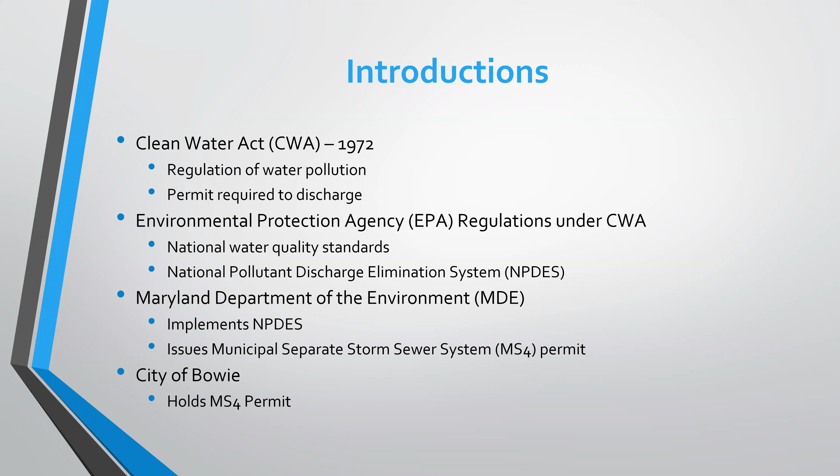So the City of Bowie is required to comply with the National Pollutant Discharge Elimination System, NPDES permit, for small municipal separate storm sewer systems, MS4 in short, to implement best management practices and various programs to reduce pollution discharges and protect water quality. The city's MS4 permit, effective in 2017, mandates permittees to restore 20% of existing impervious area that is not already treated with water quality best management practices by 2025.

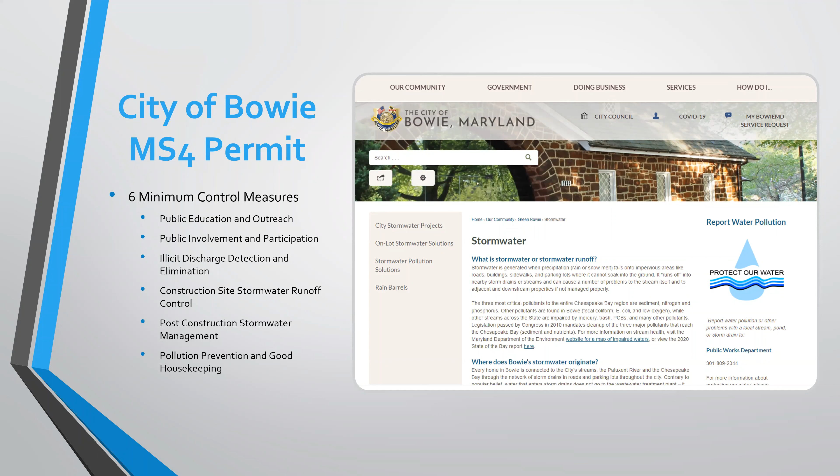So to restore the bay, the TMDL identified the overall loading capacity of nitrogen, phosphorus, and sediment that can be present in the bay to achieve applicable water quality standards. So within the Maryland watershed implementation plan, the goals were set to reduce about 25% of the nutrient loading in nitrogen, 24% reduction in phosphorus, and also 20% reduction in sediment from the base year of 2009. So in a sense, the TMDL is a historic and comprehensive pollution diet to restore clean water in the Chesapeake Bay.

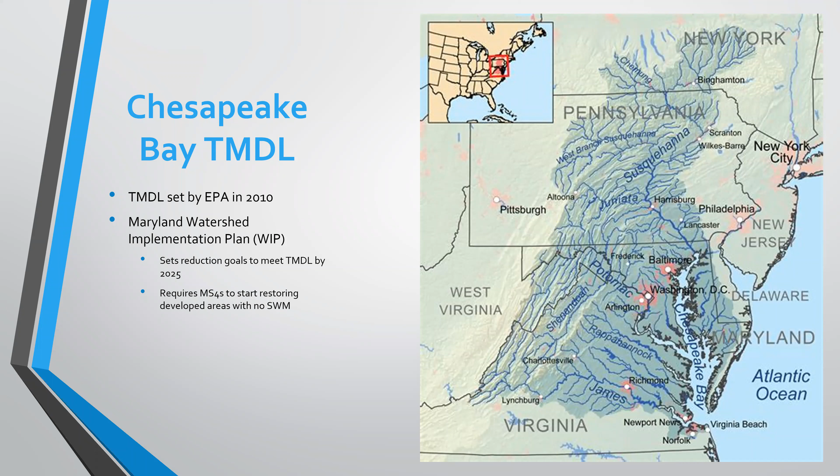And also a number of elements, including watershed implementation plans, milestones, and progress tracking are put in place by MDE and other Bay jurisdictions to ensure that all pollution control measures needed to fully restore the Bay and its tidal rivers are in place by 2025. So that kind of sums up the legal framework for the MS4 permit.

So much of Bowie was built by Levitt and Sons in the 1960s before important environmental regulations such as the Clean Water Act were put in place. Bowie, along with dozens of communities across the state, is now required to take steps to improve the quality of water that will eventually flow to the Chesapeake Bay. So in general, stream restoration projects aim to mitigate harmful effects of unmanaged stormwater runoff and also restore damaged or lost ecological functions and processes and stabilize eroded stream channels to prevent future erosions.

In addition, these stream restoration projects provide credits towards the stormwater treatment requirements stipulated in the MS4 permit. So recent changes to the accounting guidance from the state for calculating credit also made stream restoration projects much more cost effective. So the city of Bowie has successfully completed the first ever stream restoration project, Saddlebrook Branch stream restoration, in 2021, and now the city is working on the design of the second stream restoration project, Millstream Branch MS4 stream restoration, which is our main focus tonight.

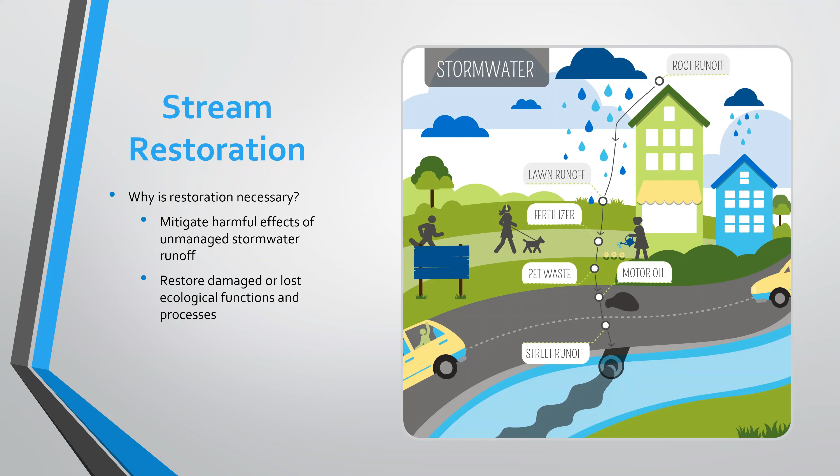So for this project, Millstream Branch MS4 stream restoration project, since 2014, the city has contracted with several engineering consulting companies to assess and prioritize the projects for the impervious area restoration to maximize water quality and impervious area credit for the city's MS4 permit. A few stream and pond restoration projects have been identified to meet this objective, which includes this current project that we're presenting tonight, in short, Millstream Branch MS4 project.

So the objective of this project is to restore hydrology and stream channel of Millstream Branch, main stem reach 4, stabilize eroded stream bank and channel, prevent further channel and stream bank erosion, and reduce sediment and nutrient delivery downstream of the current location.

Also, this project will help the city meet the MS4 permit requirements. So for this project, the city has identified an approximately 1,200 linear foot reach of Millstream Branch as unstable in a stream prioritization report dated May 2020.

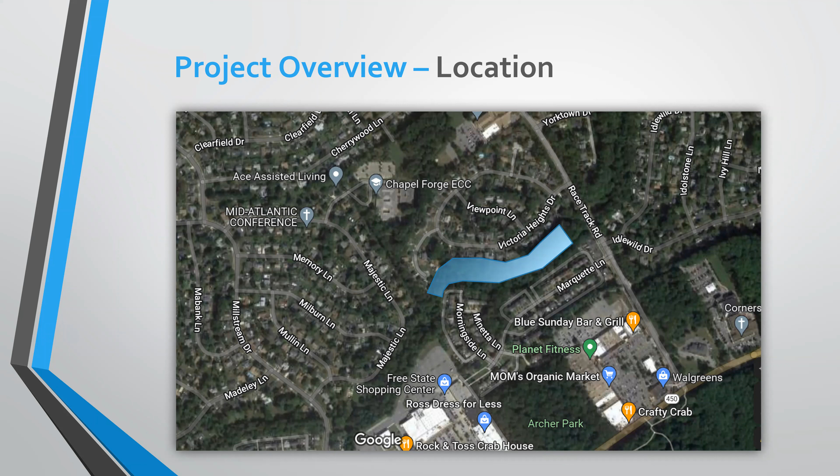So if you can see my mouse here, the stream restoration project starts from here, near Valleywood Place, where a sanitary sewer crossing is in place, and the downstream scope of this stream restoration is somewhere close to Racetrack Road.

So the stream banks along the reach range from 3.5 to 10 feet high based on field investigation. The reach is bordered by private properties, as I mentioned, on either side. And based on our field investigation, the first sharp bend is causing severe erosion to the left bank. This project, again, involves 1,200 linear feet of stream restoration along the whole stream.

It also includes the stabilization of multiple storm drain outfalls along the reach and also a sanitary sewer line crossing near Valleywood Place that is starting to become exposed along the top. So that sewer crossing will be stabilized and protected under this project.

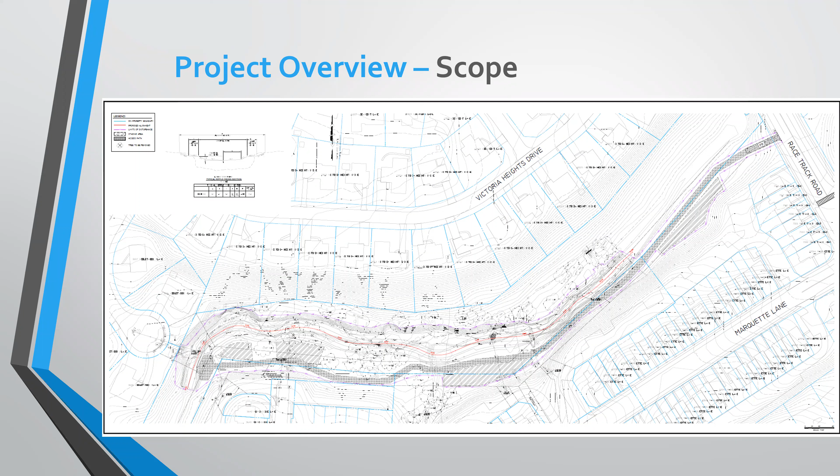So as far as project approach, the proposed design is a hybrid riffle weir system. The design will feature weirs that utilize existing channel width to safely convey a larger storm event and allow for the 100-year storm event to access an in-channel floodplain at low level shelves. Storm drain outfalls and a sanitary sewer line crossing are also incorporated into the design to protect the utilities.

So this conceptual design drawing shown here calls for cross vanes at multiple locations along the reach of the stream, riffle grade control structures, imbricated stones, rock steps, etc. for stabilization of stream bed and banks, and also protection of storm drain outfalls and the sewer line.

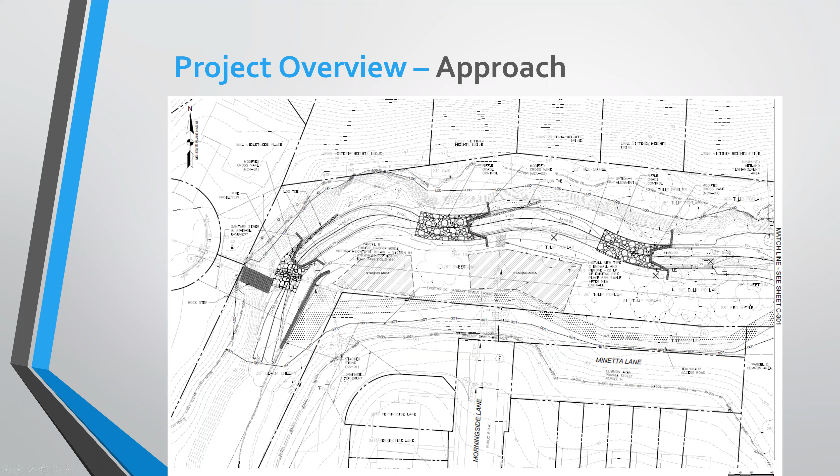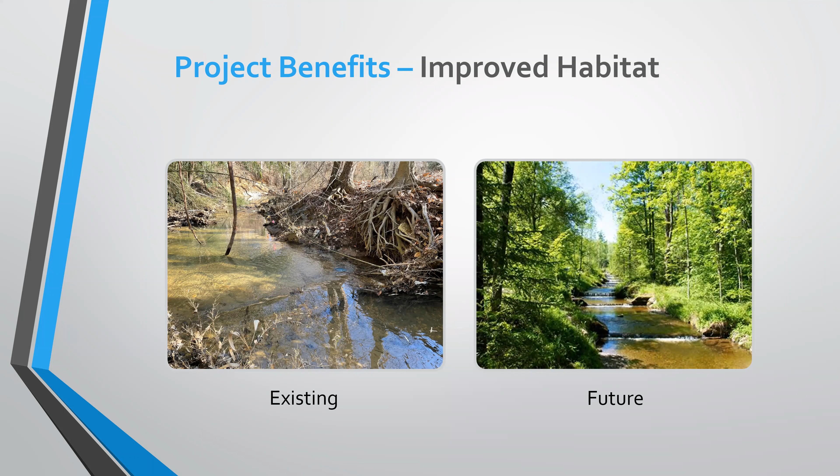The project design will also implement bank protection and grade control structures to promote stream bed and bank stability by reducing stream slope at multiple locations and flow velocity, which will control erosion. The in-stream structures will also further prevent gully development and bed erosion.

So from the existing picture here, again, you can see severe stream bank erosion already occurring at this location, and a lot of sediments. The future picture on the right shows imbricated stones for bank stabilization and also creating pools here downstream of the stone weir, and also some riffle grade control structure in the stream where my cursor is moving.

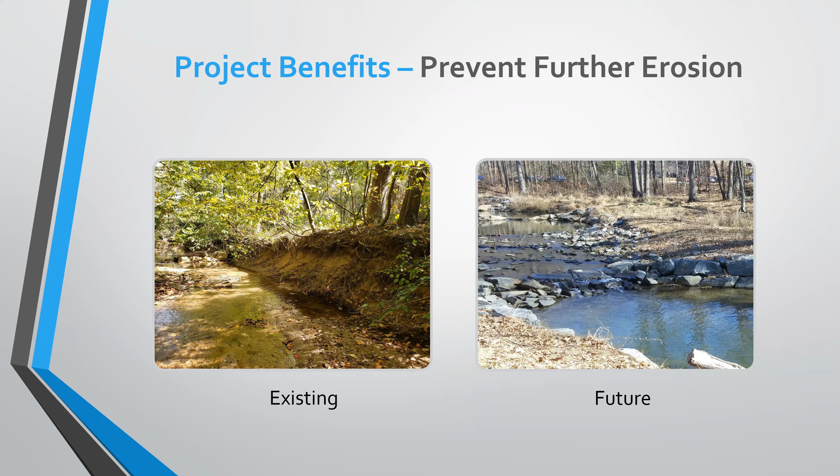So these bank stabilization measures and in-stream structures, as I mentioned before, will also help to establish a sinuous channel to restore the channel to its natural geometry. The design will feature step pools as shown in the picture on the right. You see the step pools, 1, 2, 3. We'll establish these step pools and riffles to prevent future bed degradation and promote stabilization of the stream channel.

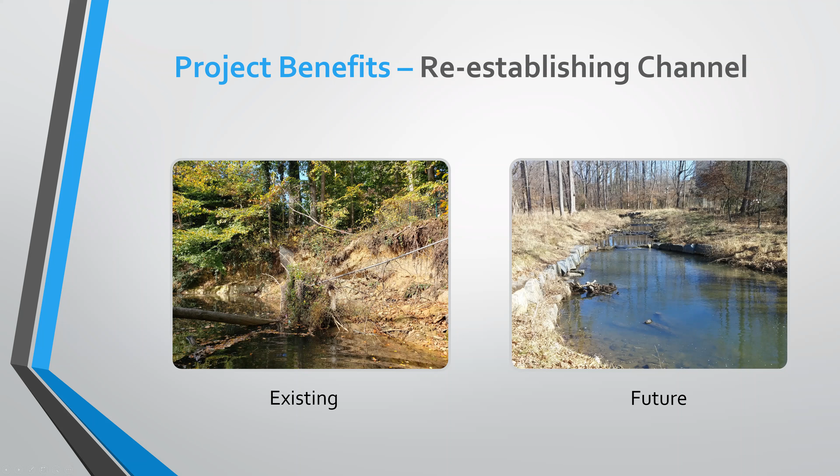So the picture on the left, again, is an existing picture taken from the site. It shows very severe stream bank erosion there, and a tree already falling into the channel. So as far as construction impacts of this project, the majority of the grading will be along the stream reach to regrade the stream bed and install in-stream structures and stream bank protection measures.

As far as the access road, the access road will be coming off of Racetrack Road on the east side of the project area. So heavy equipment and construction vehicles will be accessing the site from Racetrack Road. A temporary construction easement may be required, which we're going to discuss in the next couple slides, and no road closures are expected for this project at this point. And the access road will be disturbing a part of the common areas of the Belair Town II HOA, which we can discuss in the next slide.

Also, there will be some trees and landscaping impact to this project because the grading and construction access will entail removing some of the trees along the stream, but most of the tree removals will be concentrated around the stream area. Noise control for the construction will be in accordance with city ordinance. Erosion sediment control design has been completed, so during construction, the contractor will have to follow the city permit requirements to install erosion sediment control measures.

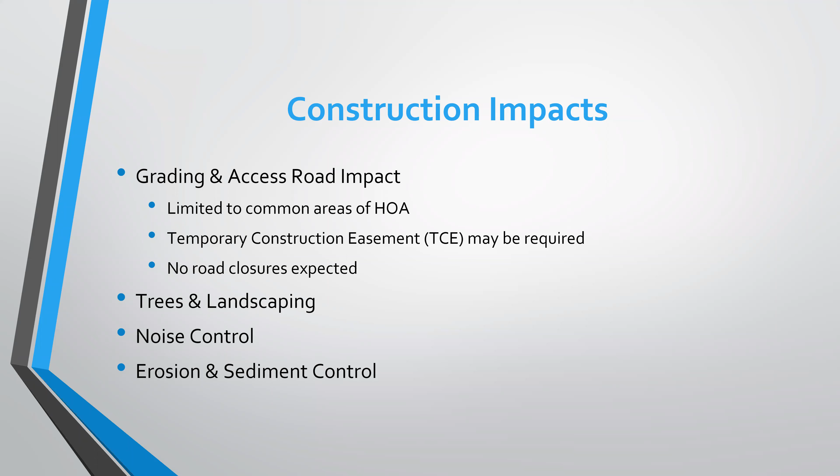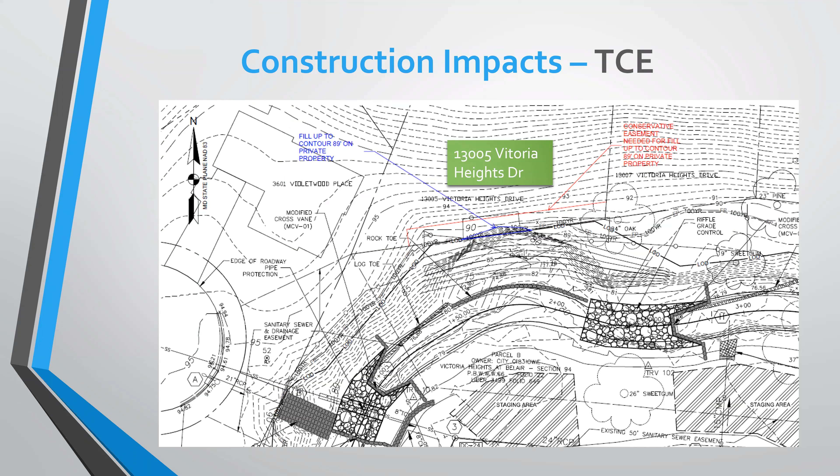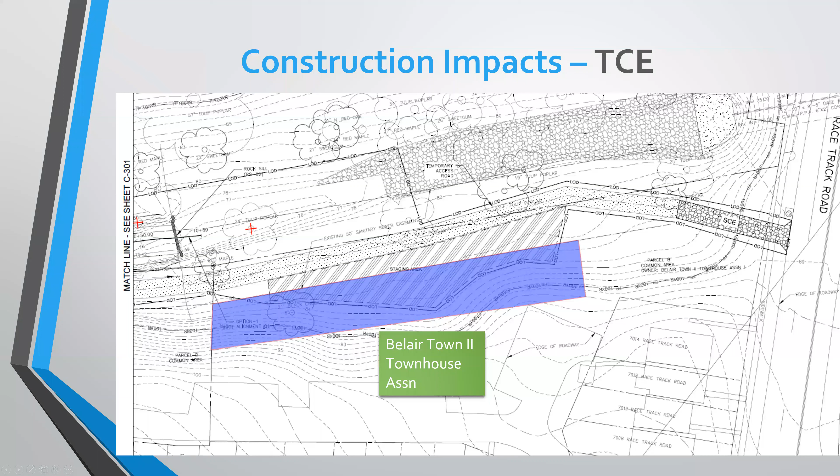So in terms of tree removal, here we're showing some conceptual level design drawings with red crosses over the trees that are proposed to be removed. As you can see here, most of the trees that are proposed to be removed are located in and around the stream area where the contractor will be installing in-stream structures and also stream bank protection measures.

So then the next picture here, we're moving towards the middle part of the stream restoration project, where you can see again these red crosses are for proposed tree removals. They're all concentrated around the stream area. There's also a staging area being proposed for this stretch here, but everything here is going to be happening within the City of Bowie property.

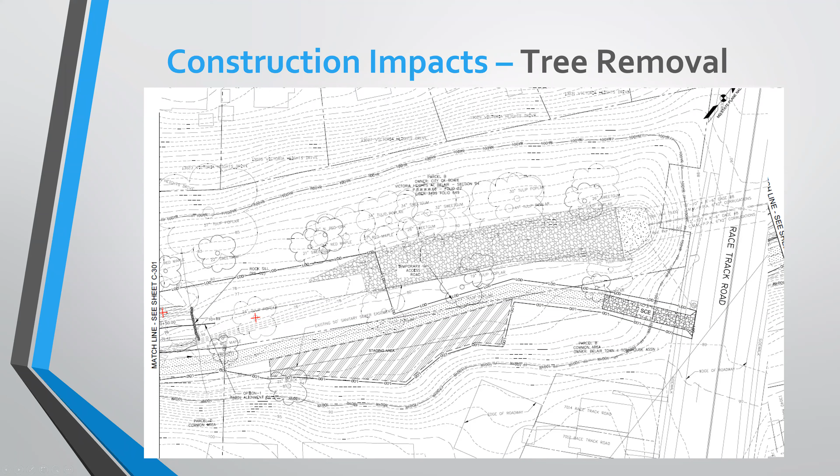So project timeline, this project is currently under design. Today's the day for the first public meeting. So we're still in the design development phase of the design process. Design completion is anticipated in March 2023, but there's a lot of permitting required with this stream restoration project. So depending on permitting and some of the other design elements of the project, the March completion date is still tentative.

Also for construction completion, we're looking at December 2023. After design completion, we'll put the project out to bid, and we're anticipating right now construction completion of this project by the end of 2023. Again, all these timelines are tentative and subject to change.